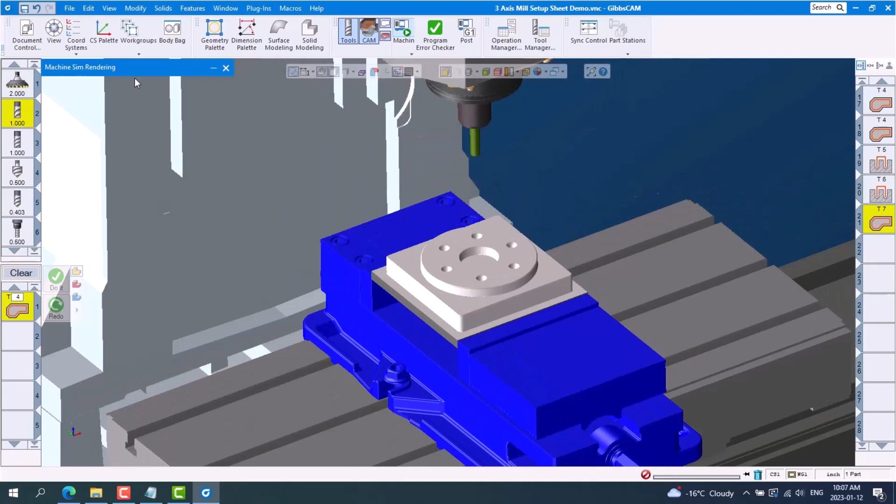In this tech tip, I'll show you how to produce a setup sheet from GibbsCAM that you can use to communicate with the shop floor to avoid costly downtime that can occur during the setup process. Downtime can happen when the setup person is searching for things like material, tools, holders, programs, and fixtures that were included during the programming process. Setup sheets are an important communication tool between the programmer and the shop floor.

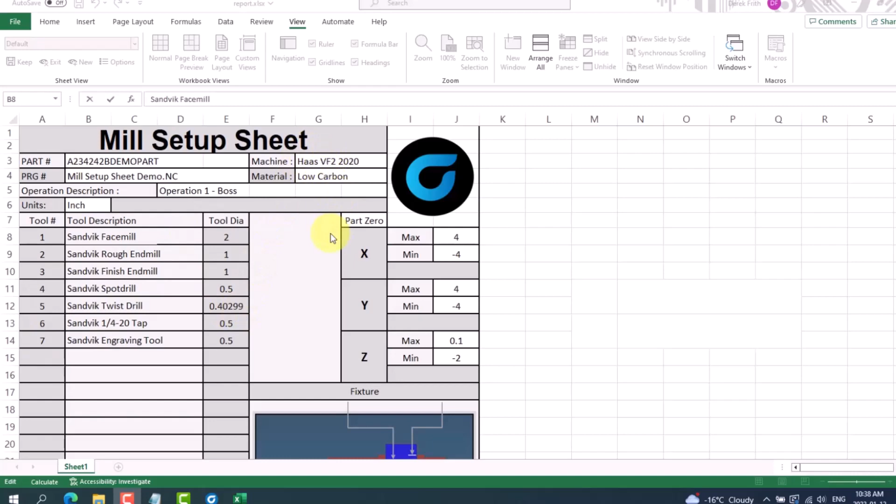Next, I'll show you the types of information you can include from GibbsCAM and how to customize the look of the setup sheet, which includes your very own company logo. Some examples of information you can include directly from GibbsCAM are part number, G-code file name, the operation description, units, tool numbers, tool descriptions, tool diameters, the machine, the material, part datum, fixturing, and an actual picture of the part.

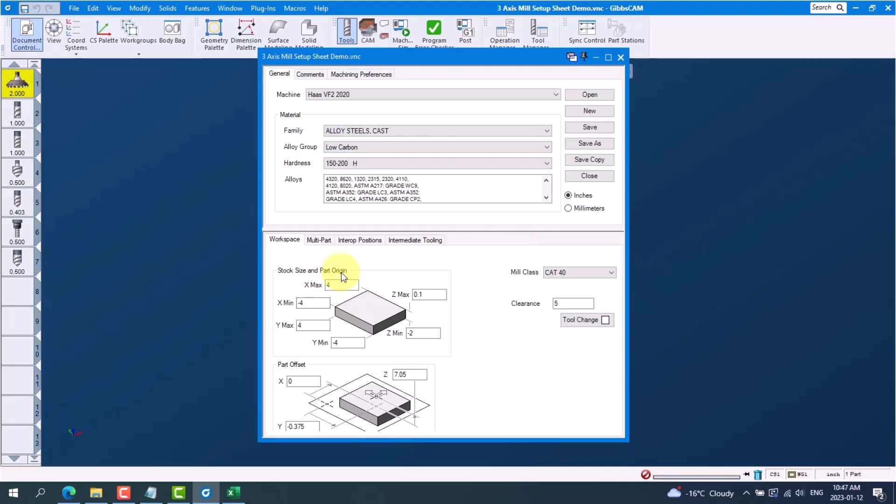Next, I'll show you where this information is coming from in GibbsCAM. If we look at our document control, this is where we get our machine from, our material, our units, the part, stock size, and origin. And if we go to the comments tab, this is where we get the part number and our operation comment.

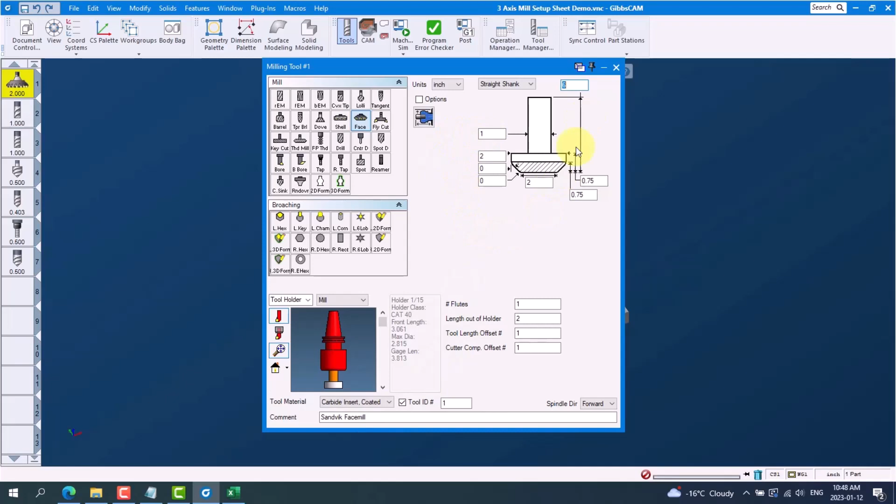Next, if we look at a tool, this is where we can get our tool number, our tool comment or description, and our tool diameter. Other information can be added to the setup sheet as it is fully customizable. With a report like this setup sheet, there are two files required, an Excel file and a text file with the same file name. We have provided a setup sheet template.

You can download the two template files in the description below and drag both of them into the report folder on your workstation shown here. Here the two files are in the downloads folder. And now I'll show you the file path. C drive, program files, Cambrio, GibbsCAM, the current version you are using,

plugins, data folder, report. You can copy the two downloaded files, the Excel file and the text file, and drag them into the report folder. You will need to provide administrator permission to move to this folder. You can click continue. And continue for the next file. And if I open the report folder, my GibbsCAM setup sheet is in there.

The Excel file includes the layout and look of the sheet itself, including titles and pictures such as the company logo. I'll now show you how to personalize it by copying your own logo into the setup sheet. To allow saving of the new setup sheet, edit this Excel file outside of the report folder. So first we need to drag the file outside of the folder, which I'll just drag to my desktop. Then I can open it up by double-clicking.

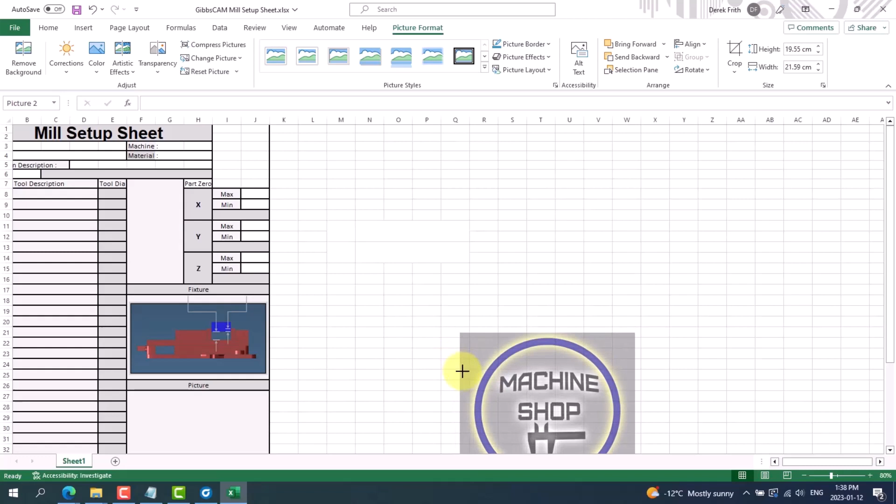And this is the space here that I've set up to copy my logo into. So I can go up into Insert, Pictures, from this device, and I've saved the logo on my desktop. So I can go to my desktop, choose my logo, and insert it. It'll be inserted into Excel, which I can resize and simply put into place like so.

So once I have this logo in place and I'm happy with the look, I can save it. Go to File, Save. We now need to close Excel to allow us to copy the file over. I'll copy the file from my desktop and I'll just drag and drop it back into the report folder. It'll again ask me, I need to provide administrator permission to move to this folder. Click Continue. And we can see now that our setup sheet is in the proper report folder.

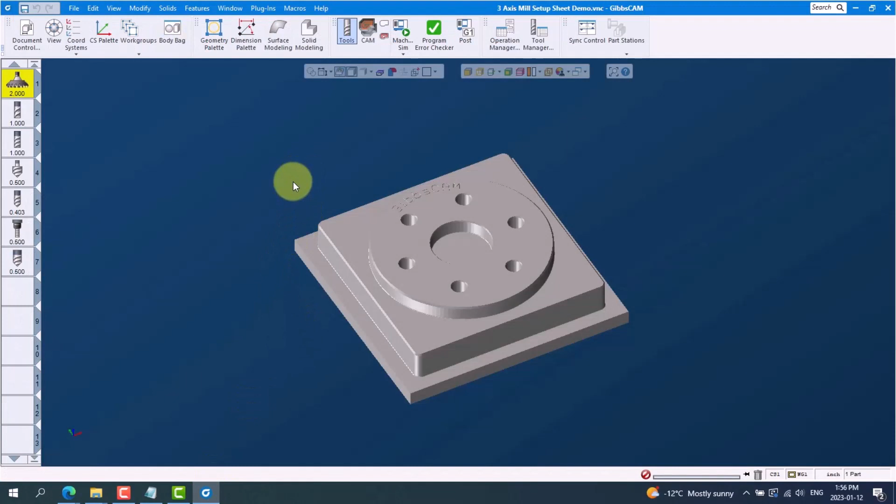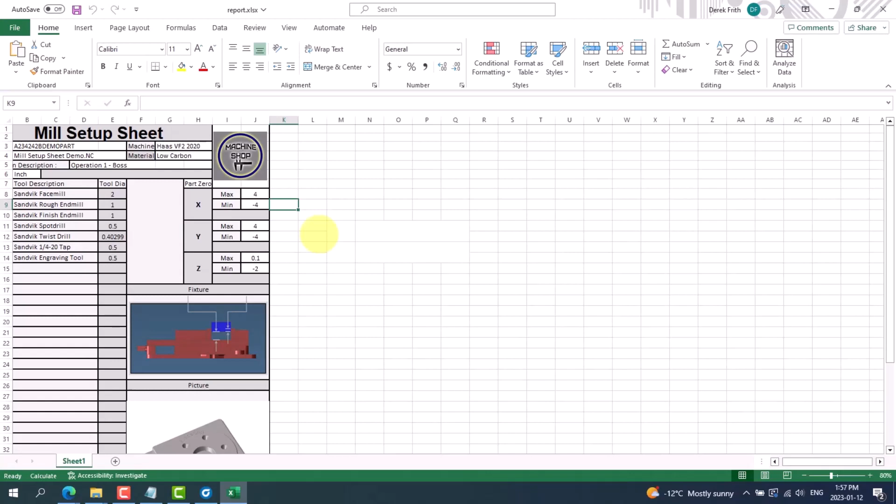And now we are ready to go back into GibbsCAM and follow these steps to print. We need to go to Plugins. Under Main Tools, we go to Reporter. Click on the Custom radio button, and let's find our new setup sheet in the list below, and press OK. GibbsCAM will load Excel and produce a ready-to-print setup sheet. This can now be printed and handed over to the shop floor. File, Print.

Creating these custom setup sheets will help you bridge the gap between the programmer and the setup team, ensuring a smooth transition from GibbsCAM to a completed part, which saves valuable time.